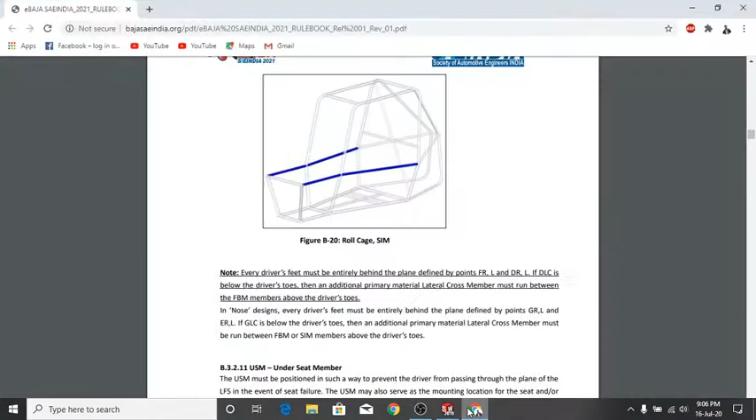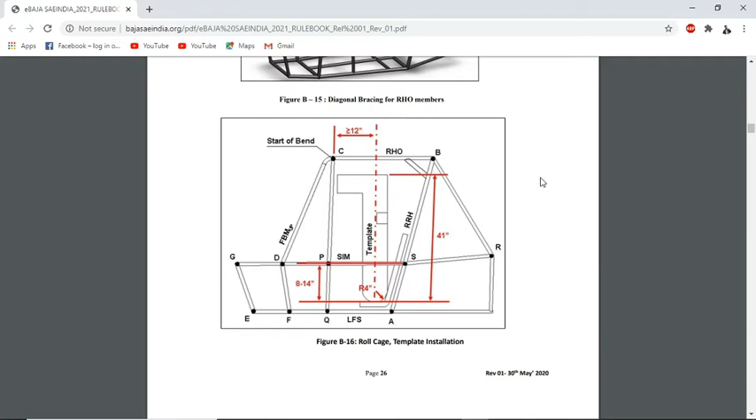So here let's go to making the SIM member, that will be the side impact member. In the Baja roll cage, the side impact member should be at a height of 8 inches to 14 inches, as you can see from the template installation diagram. So the SIM member should be 8 to 14 inches from the surface on which the driver sits. The knees of the driver should not come out of the SI member by more than 3 inches, as you find in the rule book.

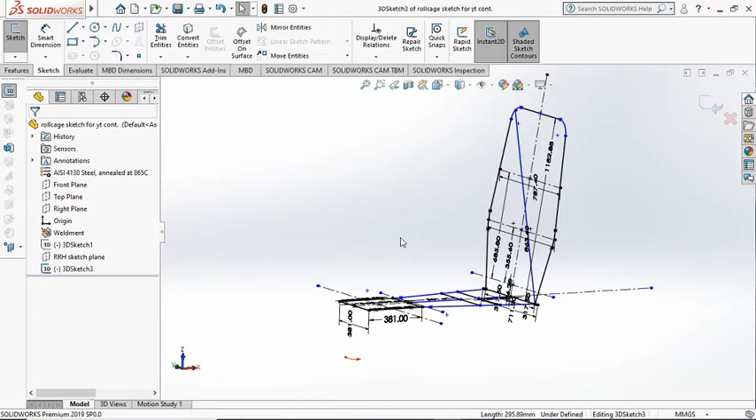As we are going to build the SI member, if you haven't checked out how to make the RRH, lateral diagonal bracing, lower frame members and underseat members, please go check out the previous videos. So here let's go for making the SI member.

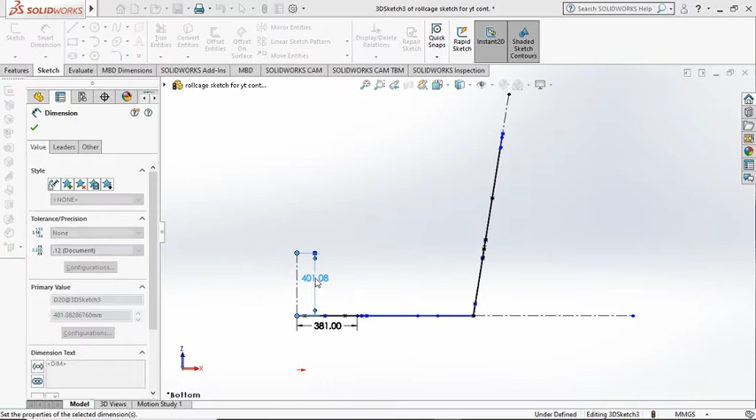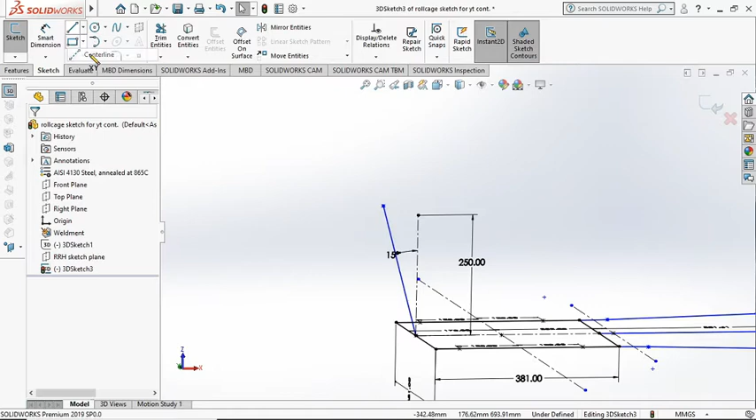As I am building a noseless chassis, let me make a line here of length 250 mm. I want my DLC to be at 15 degrees in front of the FLC plane. So this will be the FLC and this point will be the DLC. The angle of the nose from the vertical I'm taking to be 15 degrees, and the length as specified here. Let me cut and trim the extra part.

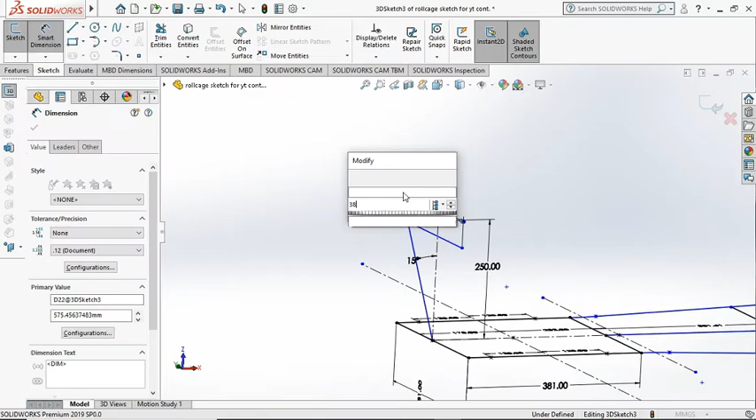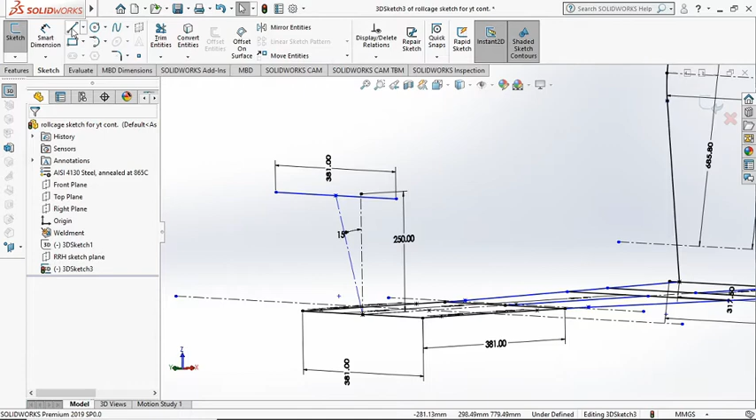Now I'm trying to draw the DLC. The DLC should be 15 inches too, that will be 381 mm. Now let us make this line for construction and join the points DR and FR, and DL and FL.

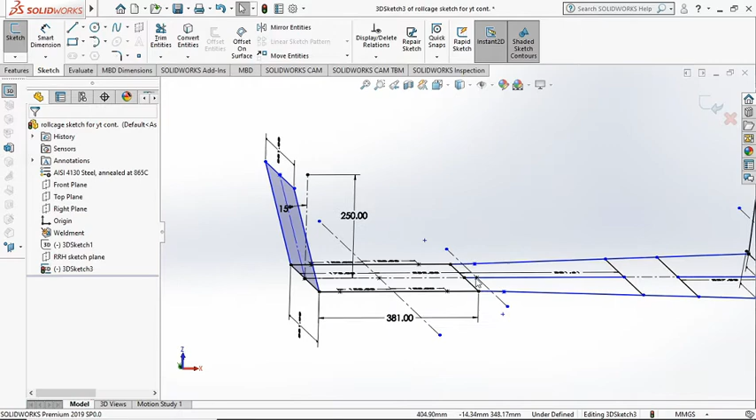Now at a point Q, let's say this is QL and this is QR, as I discussed in the previous video. I'm putting a vertical here of the same length, 250 mm, and another line just here, which will be a mirror line. I'm making them parallel and equal.

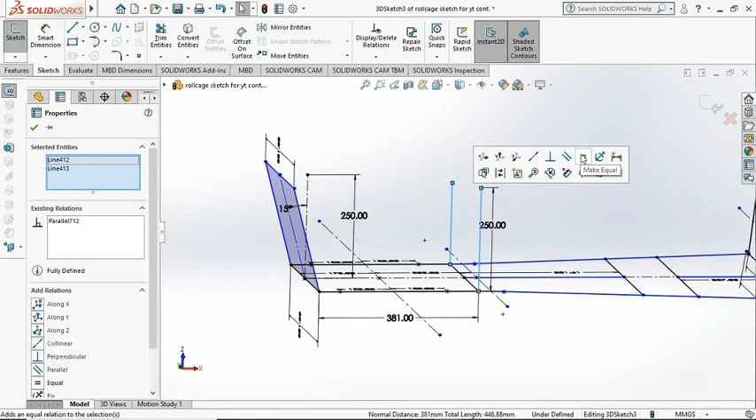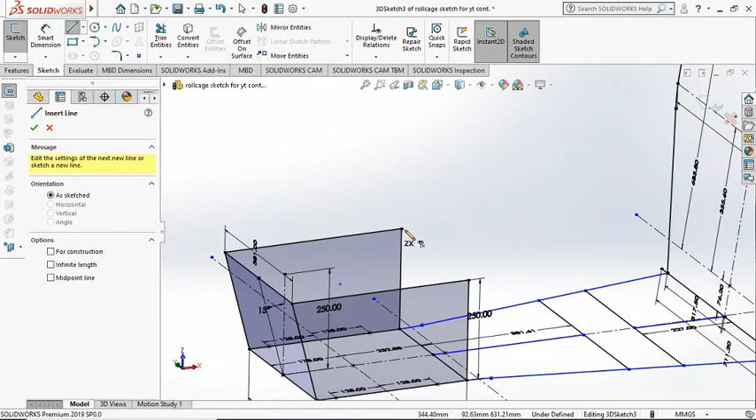Now let me join this point to this point, and join this one to this. Now I'm making a construction line of 20 mm in this way. As I don't want to disturb these lines for the bending, I just want to make this straight, horizontal. So I'll be using this point for the bending. Let me put it as 30 mm, and this part too as 30 mm.

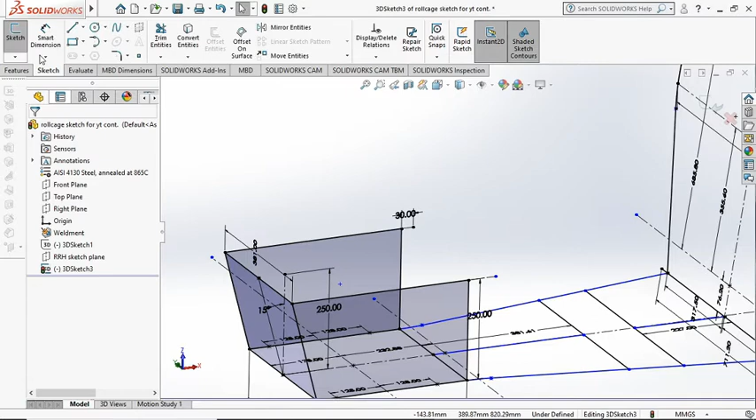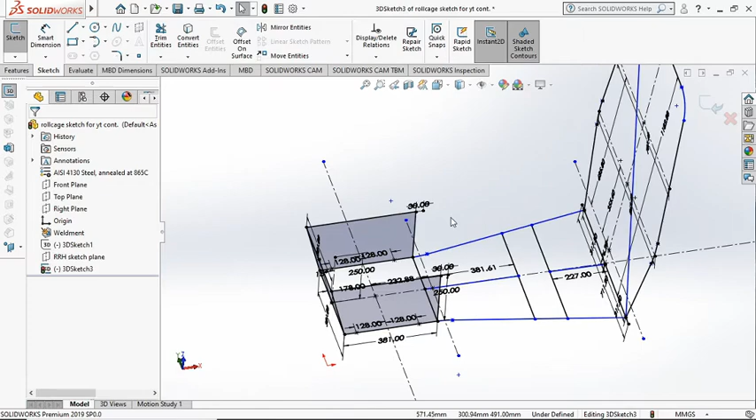Now coming to the driver's knee height. I have calculated my driver's knee height as 356 mm from the seat height, so that will be around 14 inches. Now I just want to draw a center line here, a midpoint line, along the y-axis.

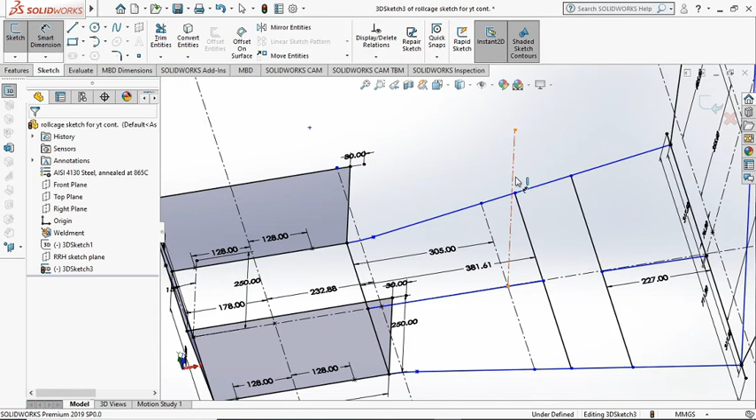Now I'm going to give the distance from the metal cross member to this point as 305 mm. Why 305 mm? This is the point where my driver's knees will be trying to go above the SI member. So there is an intersection point here, so let me make a construction line in a vertical direction along Z. As you can see below the pointer, it is drawing in the ZX plane. That's what I want. Let me give the height of the driver's knees when he sits there, 356 mm. I hope this is clear.

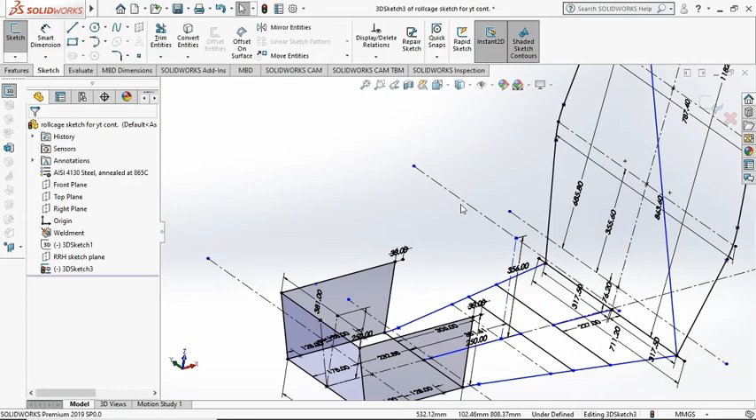Choosing a midpoint line for construction, I'm drawing a center line on the plane XY. It's a midpoint line from the line I have just drawn, that is 356 mm. This is the point where his knees will be touching the SI member. So I'm giving the length of that, a measured length, which will be 788 mm.

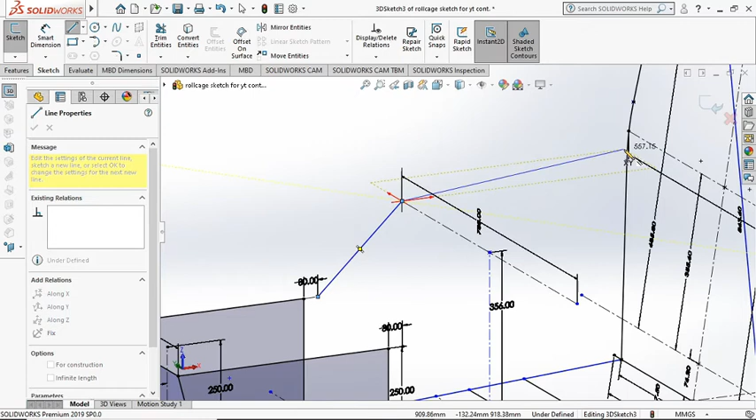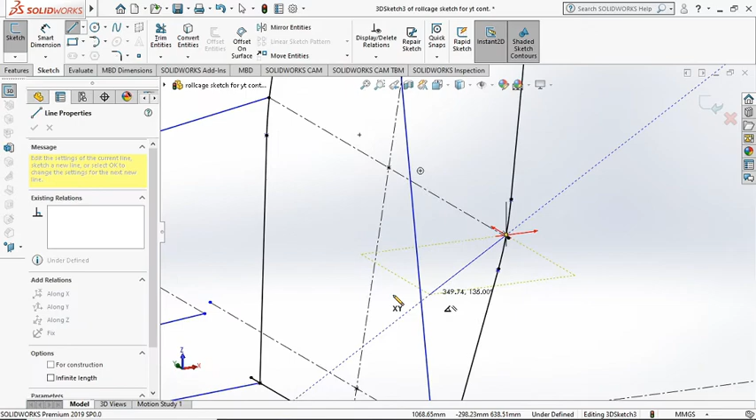In this roll cage I'm trying to build a robust roll cage that will be as short as possible and covering all the rules and regulations provided by SAE Baja India. So now I'm connecting this point to this point, and then connecting the point S. I hope you know what S is on the RRH. And now again this point to the other end, and SL to this one.

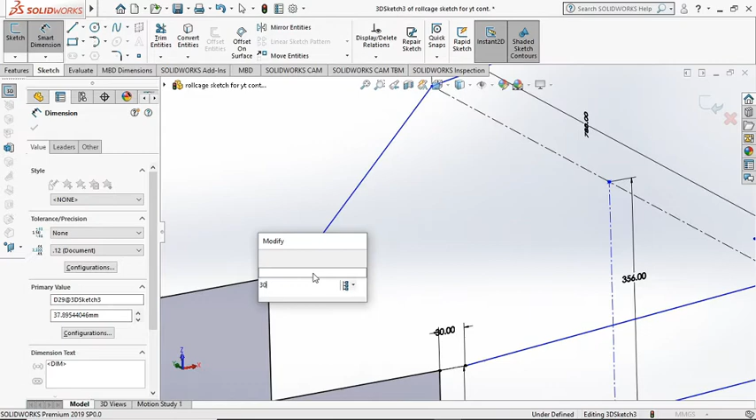Let me trim here to facilitate a bend. I hope that is clear now. Now with the help of a tangent arc I'm going to connect this point to this point, just to make a bend here.

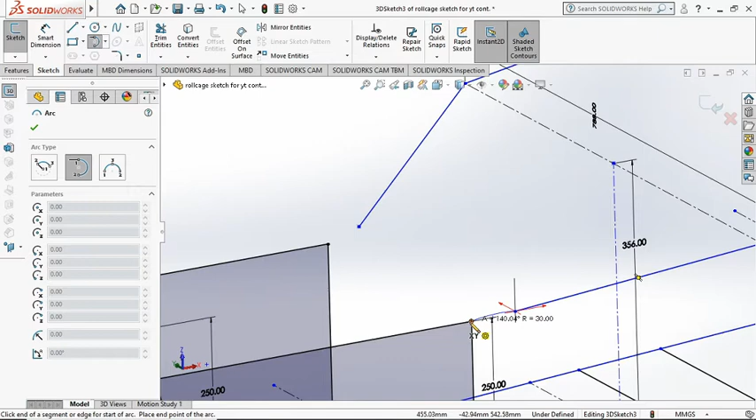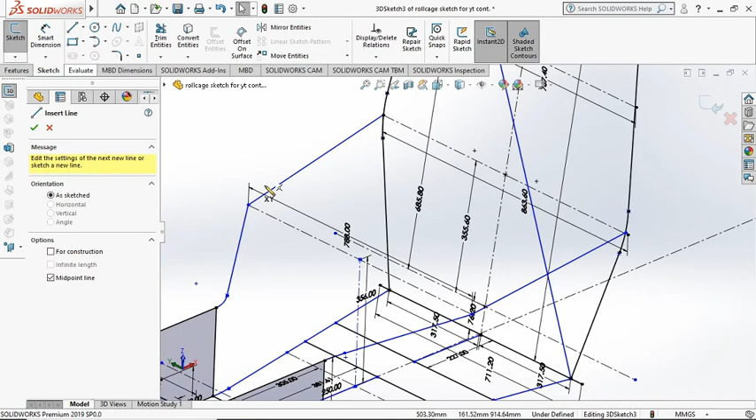Coming to the point where the driver's knees will be in contact with the SI member. Here I'm making a fillet or a bend using this method. I'm making a midpoint line here, cutting a given distance, cutting off the excess and making a tangent arc.

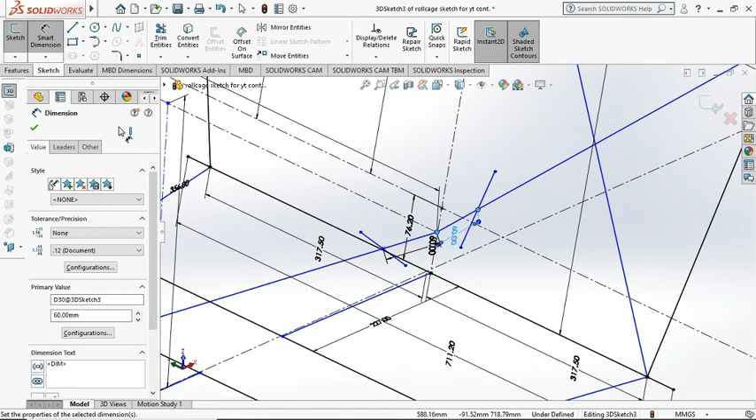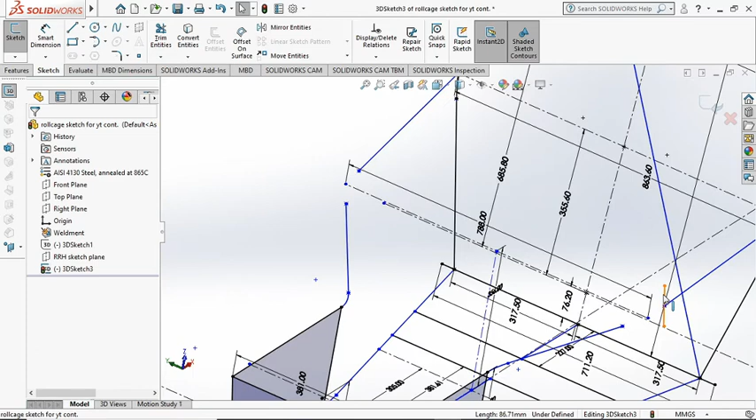Trimming the part which we don't want, where the bend comes. I'm joining these 2 points with the tangent arc, as you can see here, just like this. I hope you are getting that.

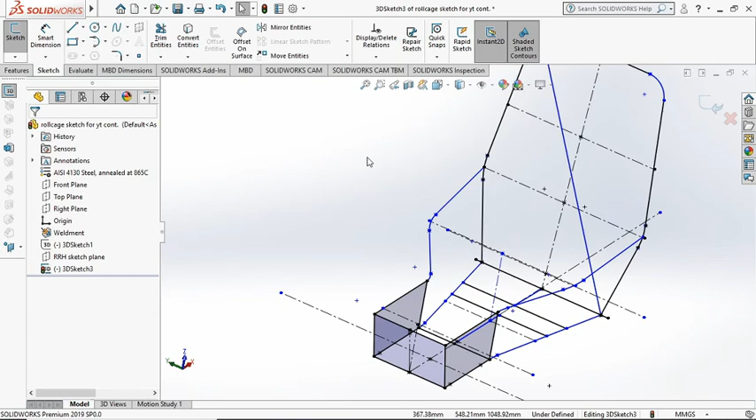Now we're done with the SI member with the given rules and regulations. This is how the side view of the roll cage looks. This is the RRH, this is the lower frame side member, and this is the SI member. This line makes up DLC, and this line makes up FLC. This is QLC in the noseless chassis. I think you guys are clear how to make the RRH, lateral diagonal bracing, lower frame member and SI member.

We will be continuing with making the RHO and FBM in the coming videos. I hope you guys are clear. Let's continue the other part in another video.